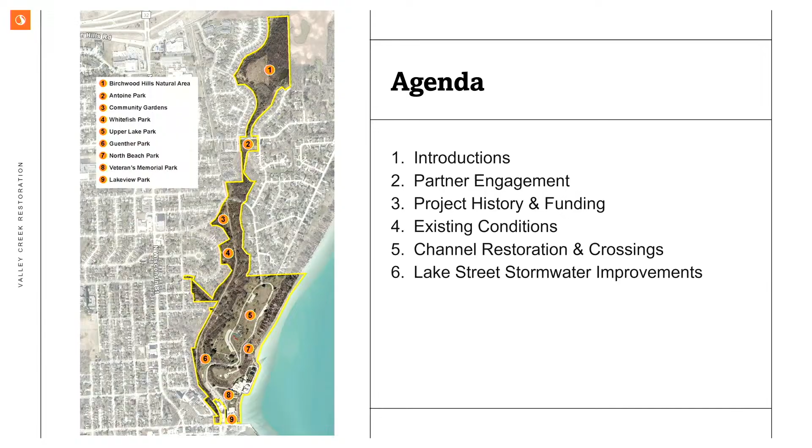So anyway, Lakeshore Natural Resource Partnership, some of this may look familiar to you guys. I came in front of you last summer to get approval on our memorandum of understanding to contract us to do this work. But we've been implementing our education and outreach.

So I have three key components of what we're doing right now. The first is undergraduate research. We're partnering with the School of Freshwater Sciences as well as Wisconsin Sea Grant.

For the School of Freshwater Science, this is our second year, and the students go out to the creek, they collect water quality data, and then they compile that data and give a presentation to Stantec, the city, and LNRP as their final project course deliverable.

One of the interesting things is that the first year discovered surprisingly high E. coli in certain spots. So one of the things we're working on this year is to trace that. We're partnering again with UW-Milwaukee School of Freshwater Science to run some assays to do DNA testing on the bacteria to determine where that's coming from, and that'll help inform the design.

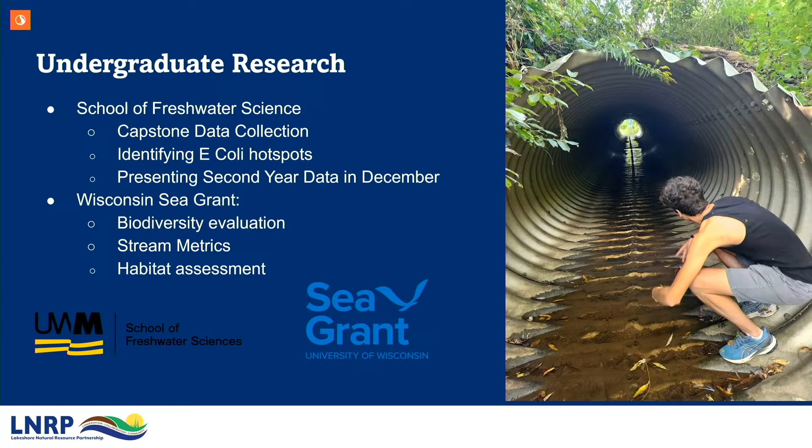We're also partnering with Wisconsin Sea Grant to do biodiversity and habitat assessment. The idea of this undergrad research is not only workforce development, but also a way to get baseline pre-construction data so that once the creek is finally constructed, we can say it's actually so much better because we have data from before.

We're also working on public communication and programming. This photo I have here is from raw footage. We had a drone fly over the whole creek. So far we've shared that internally, but we hope to have before and after, cool videos of certain sections of the creek as well.

That's something LNRP is working on as a way for the city as well as for Stantec and us to promote the work on this project. So stay tuned for more on that.

We also worked originally with UWM, with their GIS class, and we created a story map template, and we've been working with our internal team to finalize that. My understanding is that that's done.

With the public, we're hoping to have an area at the bottom of the story map that has room for public comments. That would go directly to an email address that our project team would look at. So we're hoping that's a space for the public to compile their feedback during the process, as well as provide updates for folks throughout design, construction, and maintenance.

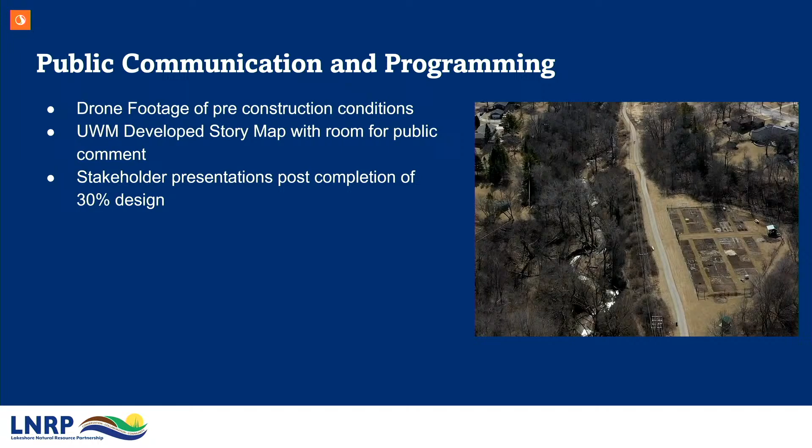And then, like Rob mentioned, we're hoping to do a meeting for the landowners, for folks whose property is adjacent to the creek or closer. That'll be a more technical presentation from our design engineers.

Last but not least, we've been engaging different agencies. We've had Wisconsin Coastal Management, who partially funded this project, Senator Tammy Baldwin's office, the Wisconsin DNR, and CALM, a networking group of other municipalities. We've had them all on site visits to allow agencies to see what we're doing here and look for potential funding opportunities.

Again, I say other ideas because if anyone has any ideas for agencies, or if there are any groups you're connected to that may want to visit the site, I'm literally under contract with you to provide that.

Last but not least is areas for expansion. We're hoping to have an ADA review of the designs by Portal Inc. That's something that once we get a little further in the design process, we'll look at, specifically with community accessibility to the creek, as well as collaborating with indigenous leadership on what the ecological management might look like. I mentioned the E. coli sourcing, and then getting some school field trips. It's something we did a little bit early in the project, but other things have had a ton of momentum, and I'd love to get back to that.

So that is a quick synopsis of the community outreach component of this project. And now I will give it over to Stantec for the technical stuff.

Thanks, Amy. Hi, everyone. I'm Sarah Maderas. I'm a scientist, like Rob said, and project manager for Stantec, and work really closely with Melissa Curran, my colleague, who I think you've all met or seen present previously, to acquire funding for this project in cohort with LNRP and the City of Port Washington.

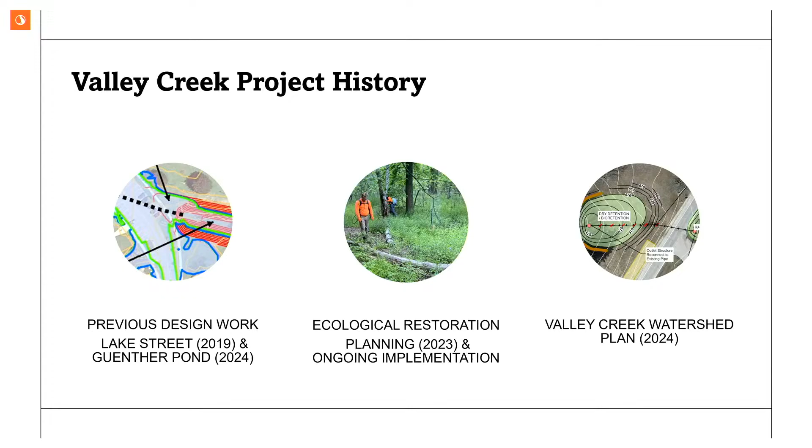Ecological restoration planning occurred in 2023 and has been ongoing since then throughout the Valley Creek watershed. That will continue to be a major component of the Valley Creek design as well. And then, of course, stormwater management planning. That's been ongoing with Aaron since, oh gosh, way back, right? So some of those elements from the 2024 plans will be incorporated in this design. So a lot of the funding that was acquired for those projects that I just talked about provided match and helped build the momentum for this Valley Creek project.

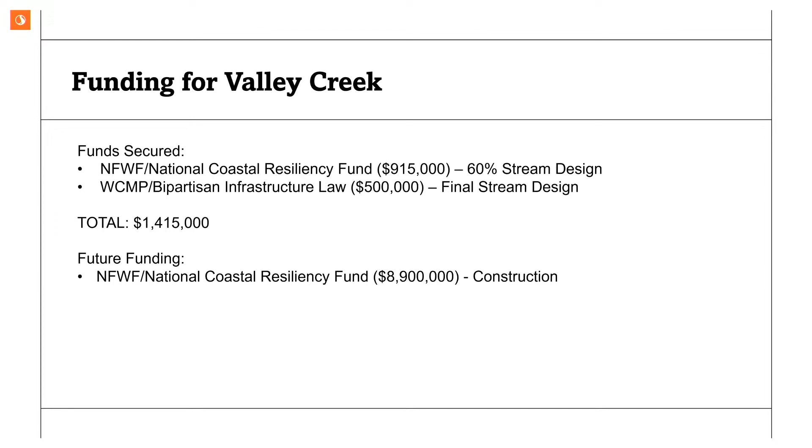The funds that have been secured thus far, Rob mentioned NFWF and the National Coastal Resiliency Fund, and then the Wisconsin Coastal Management Program, Bipartisan Infrastructure Law are the major funders behind the design itself. We're funded to get to final design on at least a portion of the project. So that's great news. And then we hope to have at least a portion of the project to final design by May of 2026 so that we can apply for additional NOAA funding for construction. That'll help put the final puzzle pieces together.

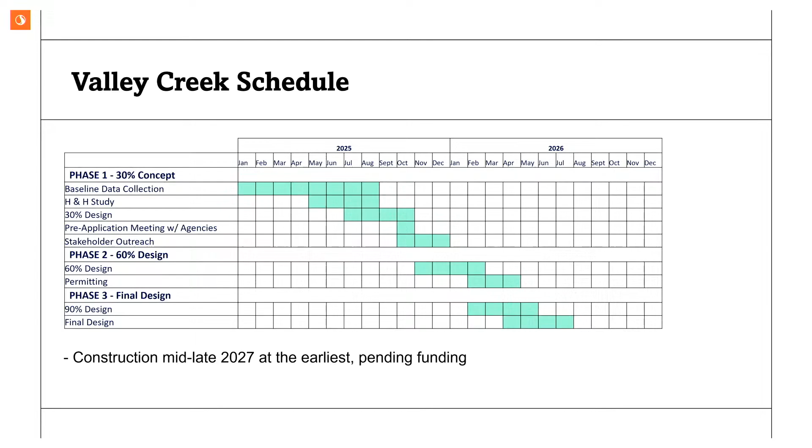Schedule moving forward, you can see where we are to date. We're running pretty much on schedule from a design perspective. Like I said, we're hoping to have final design and initiate conversations with the agency representatives, DNR, and the Corps of Engineers starting this fall and moving into next spring as we move toward final design. And if NOAA funding is awarded, we'd anticipate the earliest we could start construction would likely be mid to late 2027. So that schedule is high level. There's a lot yet to come based on the funding sources. And with that, I'll turn it over to Patrick, who will talk about existing conditions in the stream design.

All right, thank you, Sarah. Everybody, I'm Pat Philbin with Stantec, the lead of the design team on the stream restoration project, or part of the design boys, as Amy would call us. I've not heard that phrase before.

It's interesting. Getting into the existing conditions, we want to understand the erosional processes that are happening out there with the stream currently. And we look to the channel evolution model. With this model, we begin at stage 1. That's a well intact, stable channel, low flow channel, and this low flow channel conveys the base flow. And then whenever we get storms, the waters rise, they breach the banks and come out on the floodplain, the energy is dissipated. And at stage 1, we would consider this somewhat of a stable form that it's able to maintain itself.

But in Valley Creek's case, you get some development within the watershed, also some development and encroachment within the floodplain itself. You start to see increased storm flows, peak storm flows, and also more water coming down through the valley and concentrating down into the channel. And whenever this happens, the channel responds to that through down cutting. All the energy begins to focus within that channel, and at a certain point, it starts to expose the banks, and the banks erode. And so that's what we're seeing out there now in Valley Creek in a lot of these problem areas.

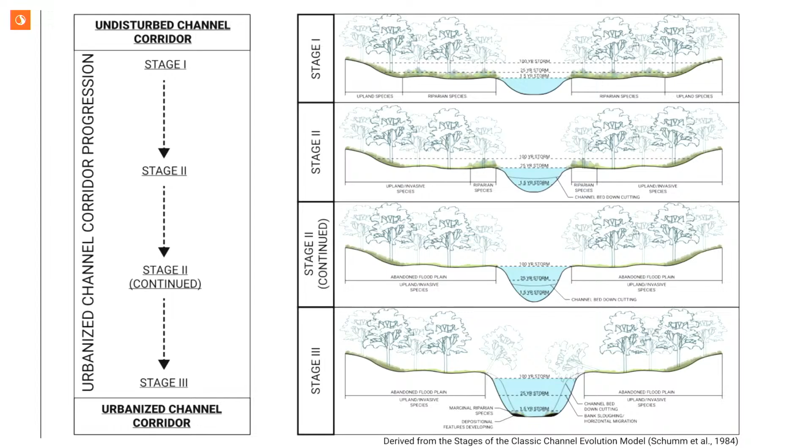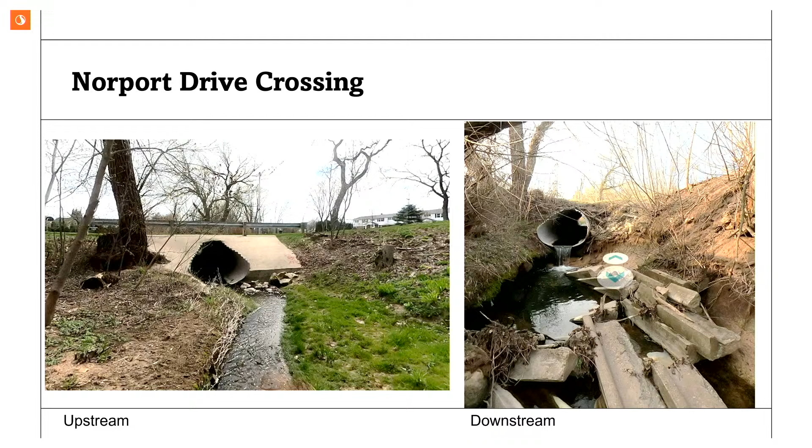So whenever the storm flows are coming through, they start building up and ponding upstream. And then we're finding in the hydraulic model that the 50-year storm is overtopping the road. And then at the downstream end of it, it's coming out like a fire hose and creating this large scour feature. If we just turn ourselves around with the culvert to our back, look downstream, we can see how the channel evolution starts to play into this.

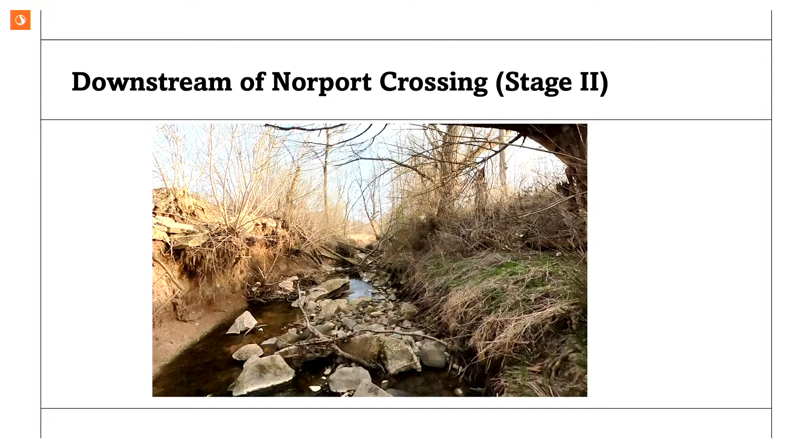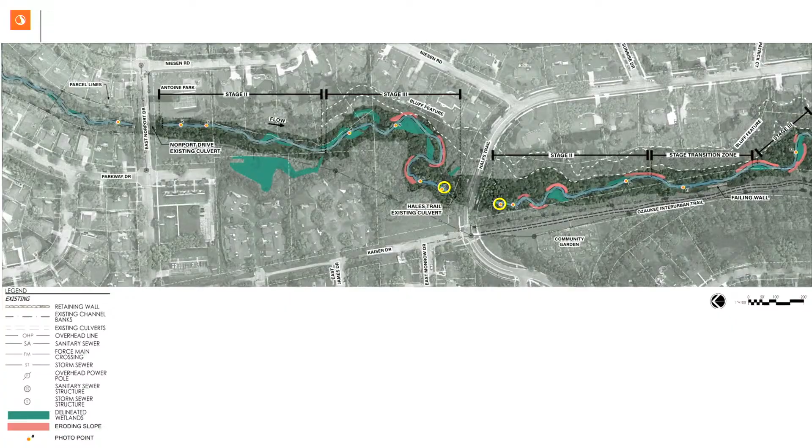We've got down cutting in the channel bed, it's abandoned its upper floodplain, and those flows are concentrated within the channel and starting to progress into stage 3, where we're seeing more bank erosion and bank failures. Continuing downstream, this is just a quick picture of where the channel's eroding the banks, cutting into the existing bluff feature. And then we get to the second crossing at Hales Trail.

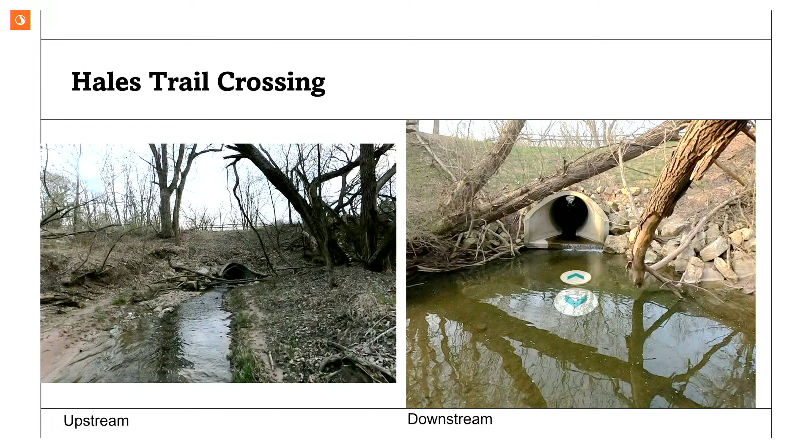Very similar feature, or same scenario as the Norport Drive crossing. We've got a nice stable reach above there, the ponding up, and then it's coming down, creating a big scour feature downstream. And similarly, if we turn around with the culvert to our back and we look downstream, we're seeing that channel incision and active bank erosion.

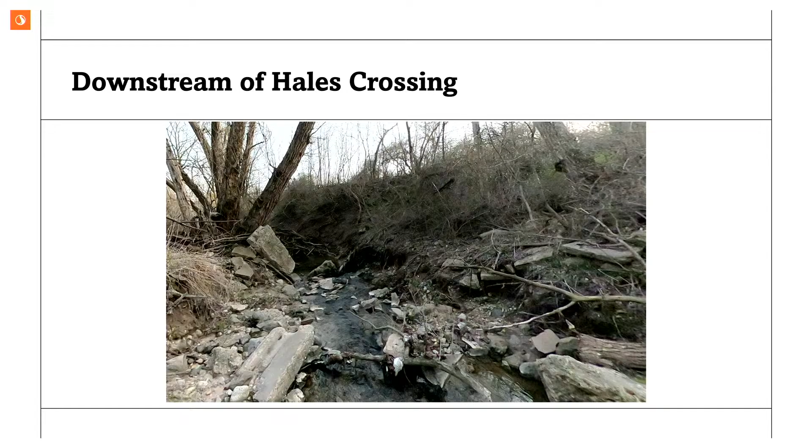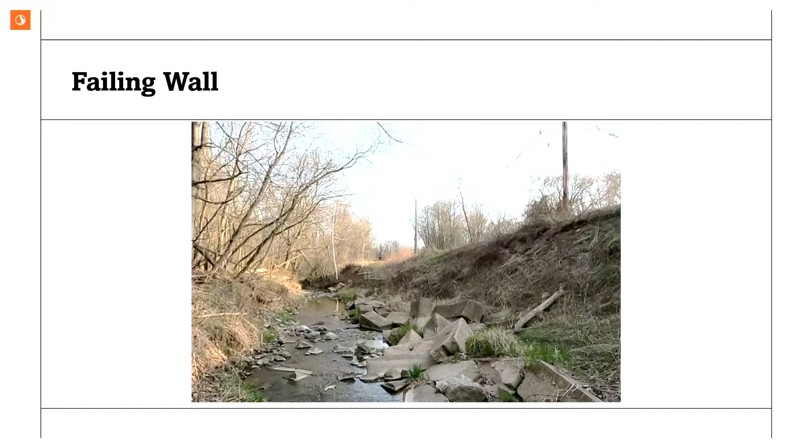And then going down even further in our project reach, there's a failing wall. The bank's starting to erode to the right here. We're looking downstream, and it's starting to encroach upon the overhead utilities and the utility poles and making its way over to the trail, and we'd like to protect that.

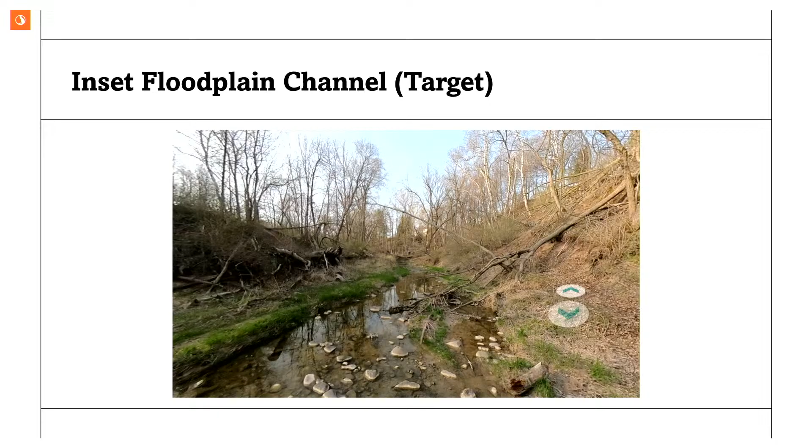And then in a few instances, we actually see what we would like to have our proposed product look like. These are very few instances, but this happens to be one of them. You see less bank erosion here, a low flow channel, and an active floodplain that's dissipating the energy of the stream. And then this is just a picture of where we plan on tying in. This is the channel just before it enters down into the Lake Street culvert.

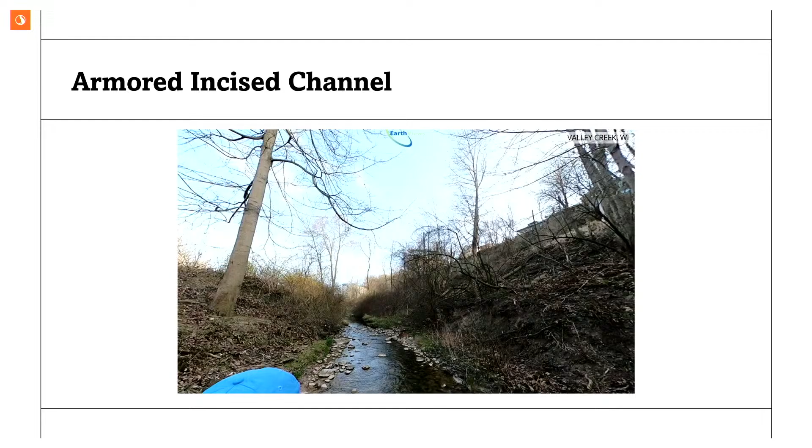So how do we plan on addressing these issues that we're seeing through the Valley Creek corridor? Getting back to the channel evolution model we talked about, we're seeing stage 2 and stage 3. What we want to do is create a new scenario where we reintroduce the stage 1 channel. So that's at the bottom here, and that will be done by filling up the channel bed a little bit, excavating out the eroded banks to give more flow area and allow for that low flow channel to do its work, and then the floodwaters to dissipate out on this newly excavated floodplain.

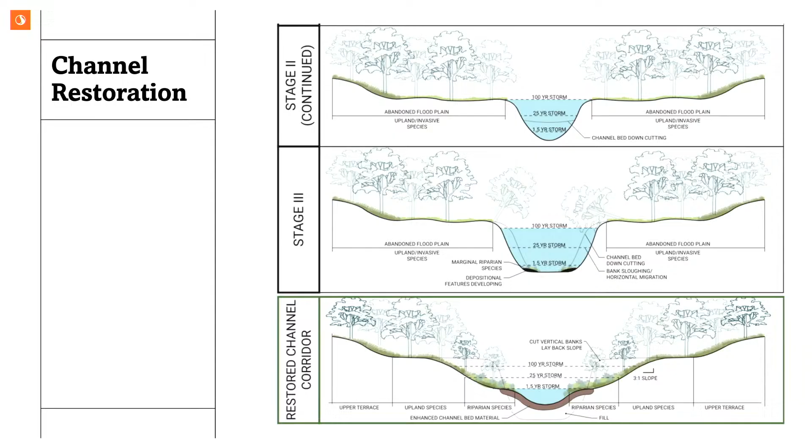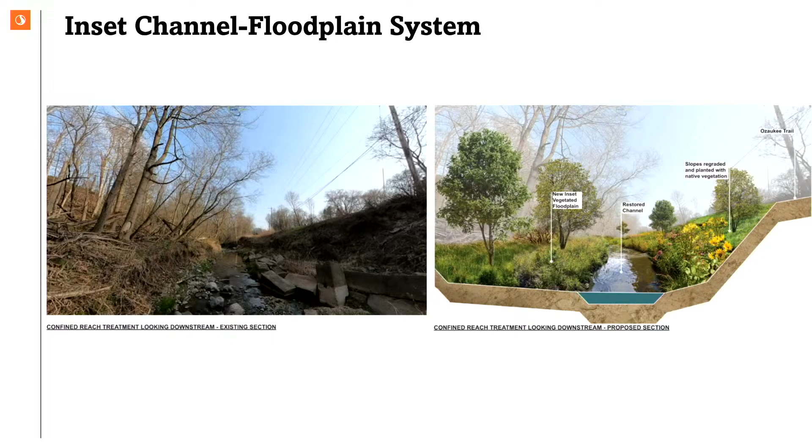To give an example of what that looks like, this is where the failing wall was, and we'll be able to bring that channel bed up and then move it over to the left a little bit, and then lay back the slope that's currently eroding, and then open up more of a floodplain out to the left. And throughout the whole entire corridor, we plan on planting native habitat or native plantings, and this will be nice and greened up for us too.

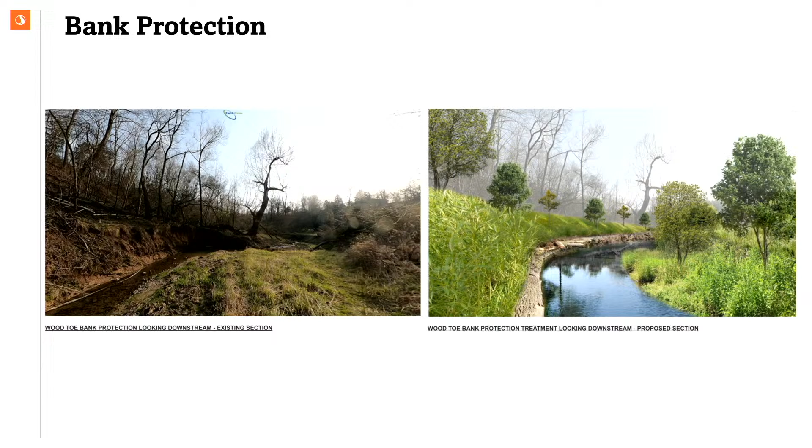And then this is just an example of a riffle that would be running through our project reach. We'd be using the existing rock and bringing some newer rock onto site to fortify the channel bed. And then anywhere we're proposing bends within our new channel alignment, we'd be putting in these types of bioengineered structures. This is a wood toe here. It's just comprised of a bunch of logs and sticks and plantings along the toe of the bank, which would provide some stability in areas where we traditionally see a lot of erosion along the outside of banks to provide that protection.

So continuing through, this is our proposed concept at the moment, and this is the upper reaches. You can see we're starting upstream at Northport Drive. The blue area here is our proposed new channel alignment, and the darker green area is the lower inset floodplain. And then outside those bounds, the lighter green is our slopes tying back up to existing. And then continuing downstream, this is the lower extents that we're showing. We're bringing our proposed channel work down to the parking area at Lake Street, and we'll have more conversation about the Lake Street area in just a moment.

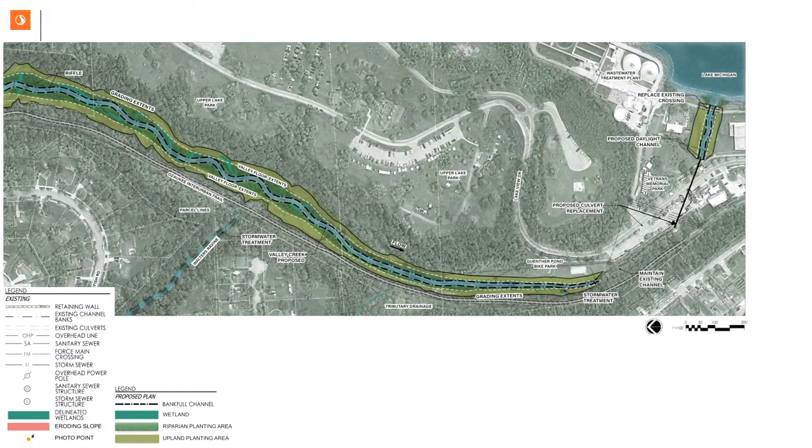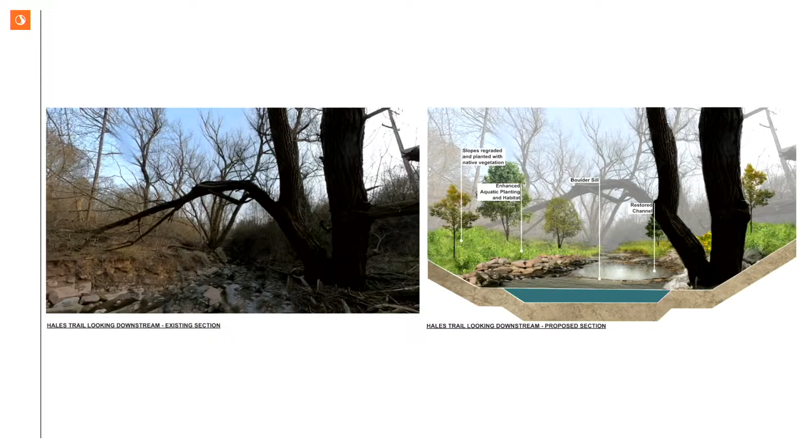So in areas where we don't have the ability to create that low flow channel and floodplain complex, we're going to put in step pool structures. These are essentially just a series of large rock, boulder rock vanes, and pools to dissipate energy rather than dispersing that energy outward. We're going to combat that erosive energy with these larger rock features and scour pools. And then this is another example looking downstream of what that would possibly look like.

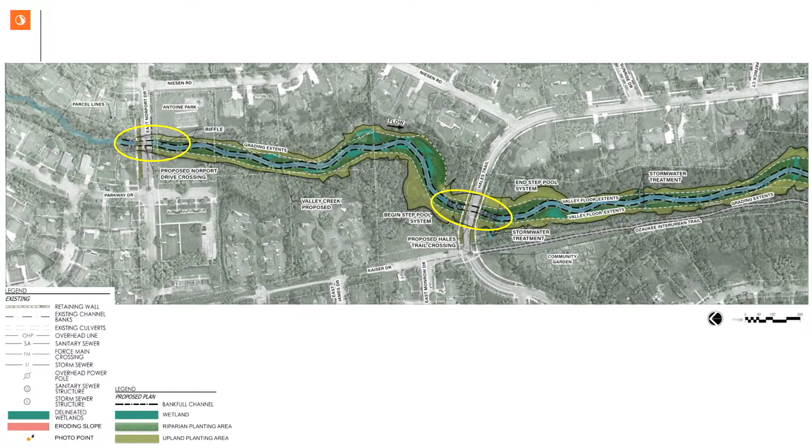Continuing, we talked about the 2 crossings, which are an issue right now. Right now, our bridge engineers are actually looking through 2 possible alternatives, one being a 3-sided culvert, such as this, and then the second option being a single span. And we're working with them to try to get some type of finalized concept for that.

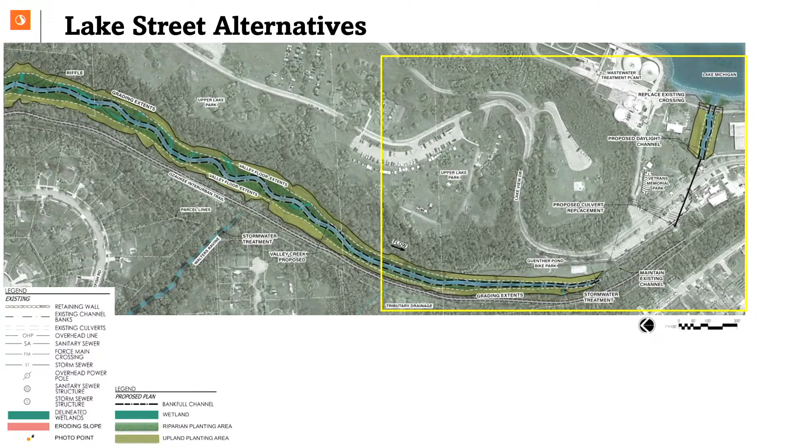And now focusing in on the Lake Street alternatives, we understand that there have been some flooding issues down there, and we'd like to propose some solutions to alleviate that. The first approach is simply just removing the existing culvert. Right now, it's undersized. It's passing the 10-year storm, and anytime we're seeing larger stream flow, it's overtopping and flooding out the Lake Street. And something we wanted to consider in this is, there's minimal parking space already down there, and we would just like to maintain that parking space for you guys to have for these events and everything that you have down here.

So by removing the existing culvert and replacing that with a larger culvert, that would convey larger storms, alleviating those flooding issues. And then daylighting that out, just as it gets beyond the parking area, into an open channel the last 200 or 300 feet before it ends up in Lake Michigan.

Second alternative is a split flow scenario. So as we understand, the existing culvert maintains the 10-year storm. So we would allow for the 10-year storm to pass through the existing channel and go through the existing culvert. But any storm flows above there would access this overflow wetland complex to the left where the Guenther Bike Park currently is. And then we would place a proposed storm inlet at this location and convey the flood flows subsurface through a culvert underneath the parking area of Lake Street and daylight that out into the new open channel.

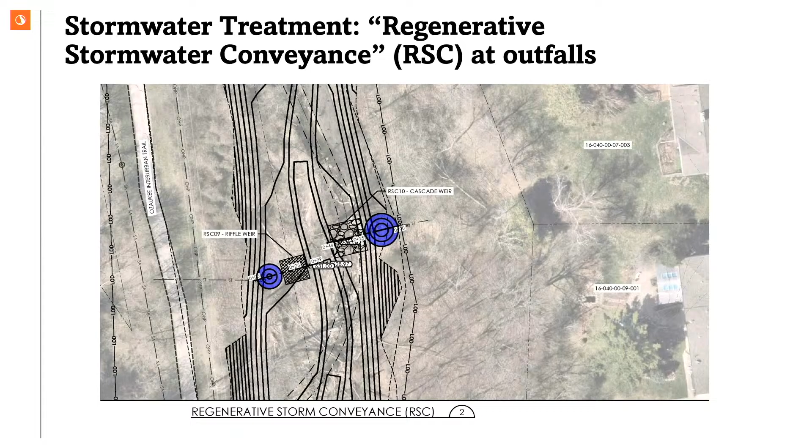They are sort of a small scale version of the step pool system that Patrick talked about. Basically, the idea is that they use a series of rock cascades or rock drops combined with pools to both protect against scour and erosion and also to some extent filter stormwater as it passes through there, rather than just having storm sewers outfall into the creek without any sort of water quality treatment and without really adequate stabilization for scour.

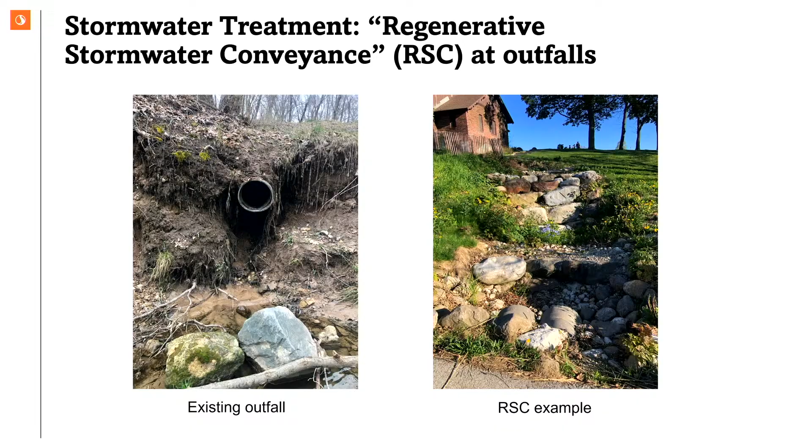We didn't want to call it the Whitefish Ravine because Whitefish sort of loops around. There's actually a couple different ravines and channels that come off of Whitefish and Lakeview. But if you call it Walter Street, that sort of pins it down. But if anyone wants to suggest an alternate name for this ravine, there's still time.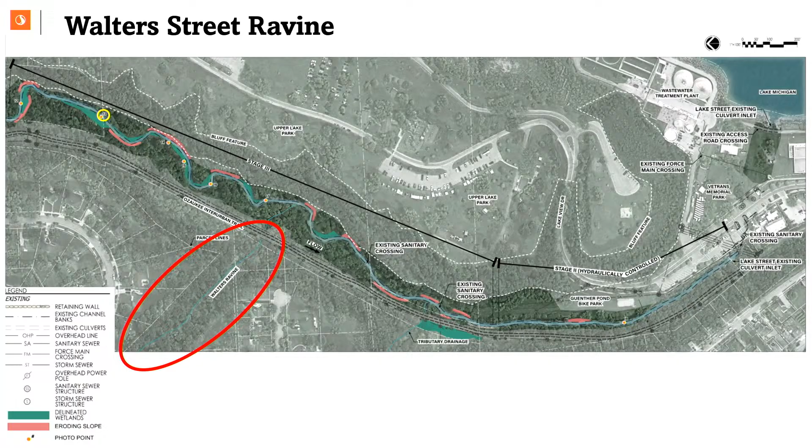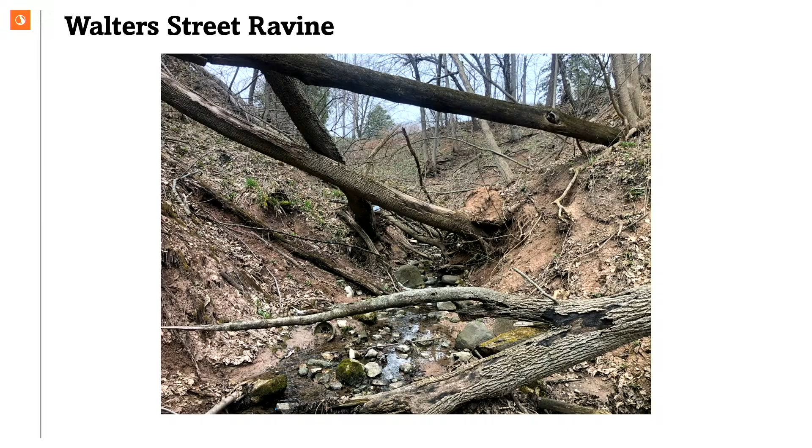This is similar to Valley Creek itself. The ravine has experienced a lot of the similar issues, just on a smaller scale. There are several storm sewer outfalls. There's no stormwater detention because of the age of the development in the watershed, unlike some of the newer areas of Port Washington where we're putting in stormwater management ponds and green infrastructure and stuff like that. So there's down cutting, channel instability, channel erosion, some of the same things that Patrick talked about on Valley Creek itself. Here's a photo of existing conditions.

We're looking at a step pool system here. Patrick has talked about a similar step pool system that we'd be looking to implement in certain parts of Valley Creek itself. This is an approach where the valley is steep and confined. There's not really room to allow that stream and floodplain to spread out and dissipate its energy that way. But with these drops of water, we use rock drops to control some of that energy and force, with pools spaced between them. The idea is that the pools provide some filtering, maybe some aquatic habitat and so forth.

This is an alternative to what people did 30 or 40 years ago, which was to totally armor a ravine - just a straight run of big riprap all the way down. In some cases that worked okay for stabilization, but we're finding that if we look at something that includes pools and riffles, generally people find it looks nicer and it adds ecological and habitat value also.

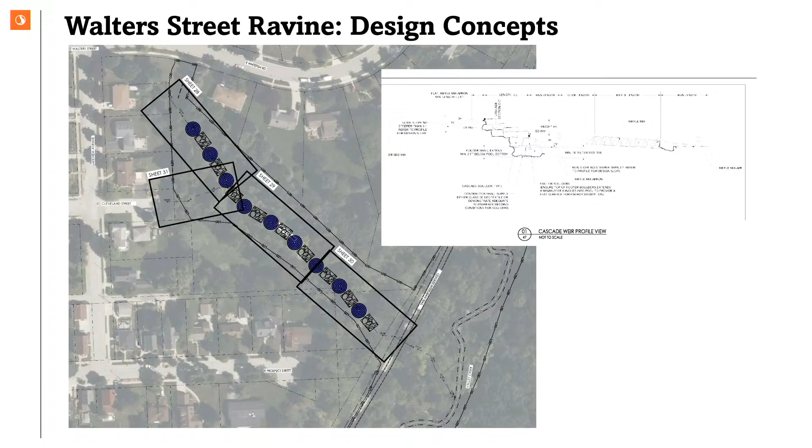Other question I had - I'll stay towards the end - is with the culvert crossing at Lake Street. One thing is with replacing a box culvert, and even though we're daylighting it in the park, culverts aren't typically very picturesque. Nobody goes and takes pictures or admires your box culvert entry.

It might be worth losing some of the parking in order to make a shorter, more bridge-like crossing at Lake Street. There's some opportunity for more parking west of the band shell along the wastewater treatment plant access road, which has been widened at the request of Fish Day but isn't used for much. It's just a little parallel parking now, but that could become angle parking, making up for parking lost to a more naturalized creek with a shorter crossing, which is probably cheaper to build as well. So just something to consider.

Another question I had was about River Curves, where we were showing the logs along the side of the creek. What type of maintenance will the city have to do to maintain that? I presume if they're logs, they'll eventually rot away and we'll have to do something else, unless that's planned for. Is this naturalizing the creek enough that we don't need to worry about replacing the logs in the future?

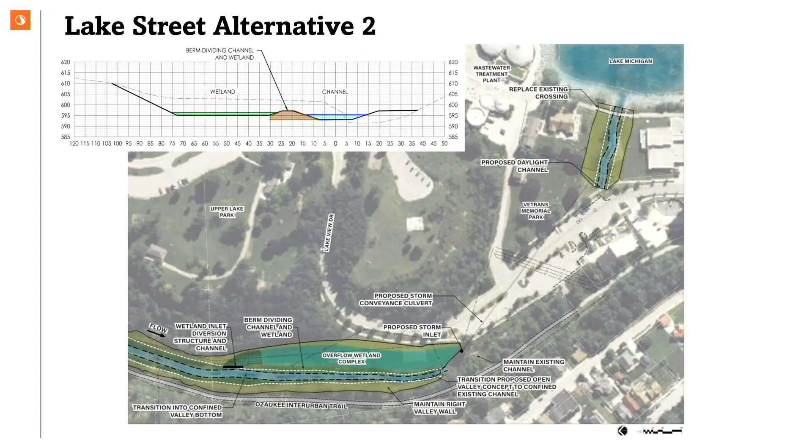Can I ask Mike, why do you prefer the culvert over the bridge?

Generally, it depends on the culvert type structure and what you're doing, but generally the culvert type structure tends to last longer with less maintenance than a bridge. I suppose that depends on what you're doing. You could look at the Grand Avenue Bridge on Sauk Creek, built in 1917, I believe, which is one of the oldest existing bridges in the county and it's still in really good shape.

It's been expanded a lot over the years, but that type of structure seems to hold up well. I'm not sure about something like Contech's rapid insertion aluminum type structures, exactly what the longevity of that is. But when you start to get a bigger bridge, that's much more expensive, and it tends to cost more to maintain because you have to widen it. It's a much longer crossing, you've got a bridge deck and stuff, whereas with the culvert you basically just run the road over the top. So that's my concern, bridge structures seem like a bigger ongoing maintenance obligation than a culvert.

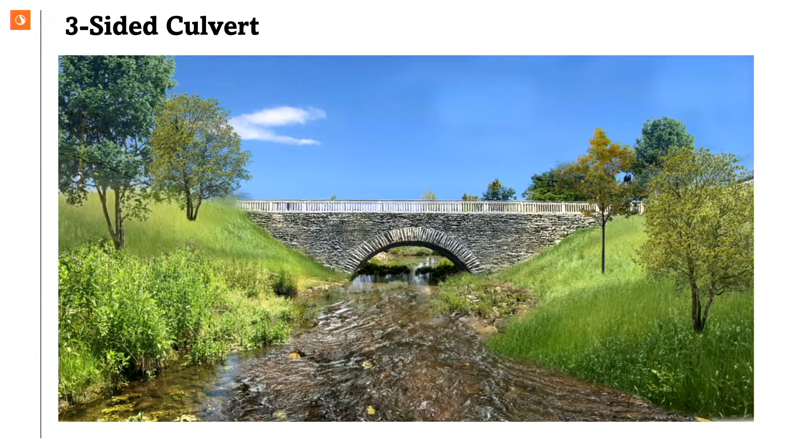If I'm just making assumptions based on the structures, one's a bigger maintenance obligation and would cost more in the future. So if you have better numbers to prove me wrong, by all means, we'll listen to them.

My concern, and this is something we'll have to work out, is I worry that someday debris is going to get back into the channel, and that could clog more than the bridge, which is such an open space. It would be more of a catch. I actually kind of like the bridge better.

The other thing we've talked about is a bridge offers the possibility of running a trail through the bridge opening. You may have seen that done, where you build a little shelf or bench next to the stream. We haven't talked about it a lot, but I think it's something we'll be looking at more in the future. Trails and trail connectivity would probably work better with a bridge opening if you want a trail that didn't have to rise to street level and cross the street. So just something to consider also.

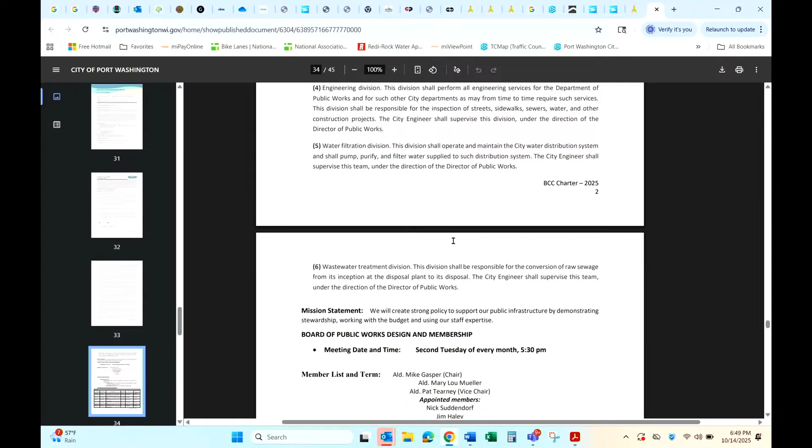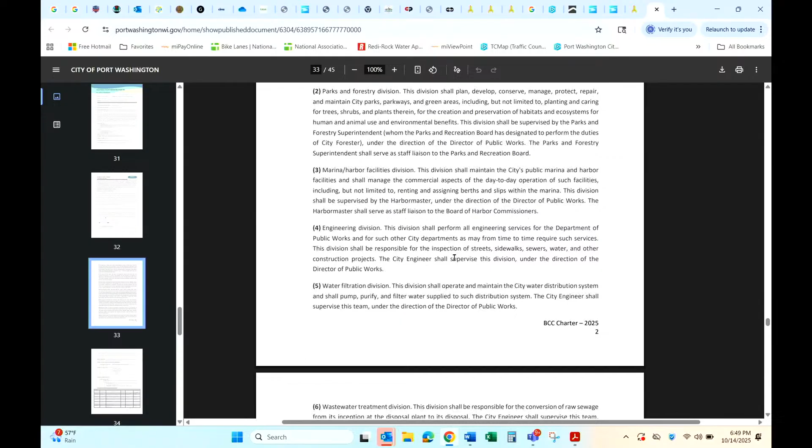So we're going to be cleaning all that up hopefully in January when we're in the first quarter of next year. Okay. I'm just bringing it up because otherwise I'm afraid it'll be 3 years from now and we won't have cleaned it up yet. It could be. Sorry, that's the one, the organization? Yeah. Okay, I'll make a note. And yeah, just next time the opportunity arises, include that stuff. Sure.

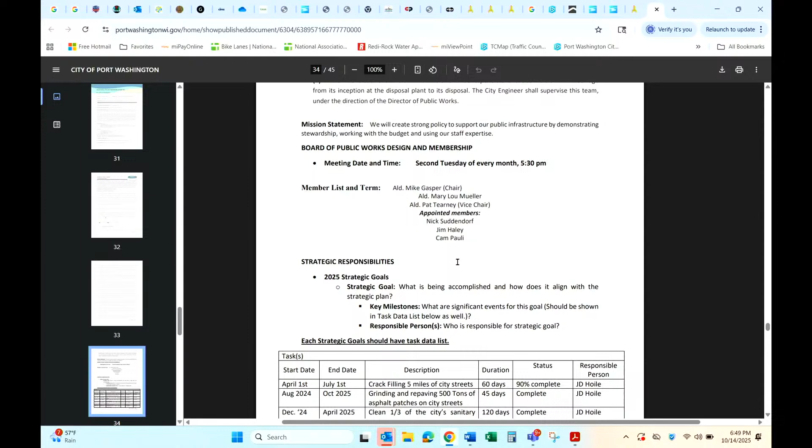And so I'll read our mission statement because I had this conversation with Mary Lou about making sure that everyone on the board was aware of our mission statement. We will create strong policy to support our public infrastructure by demonstrating stewardship, working with the budget, and using our staff expertise. We have our strategic goals listed, and that's really what I typically go through for our quarterly report. We have a number of items under our strategic goals. So I'll blow through them as quickly as we can. Most of them were either complete or on schedule.

For instance, in the street department, crack filling and the pavement patching that we do every year is complete or nearly complete, along with cleaning a third of our city sanitary sewers. We sweep the streets every month, and then in fall we're through every street at least every week for the 2 months of leaf collection. Cleaning half of the city's 400 catch basins takes place every December, so we haven't started that yet. We have a new street sweeper in our street department. You may remember the one that we had was not doing the job, and so we needed to get a new one. This year, that's been delivered.

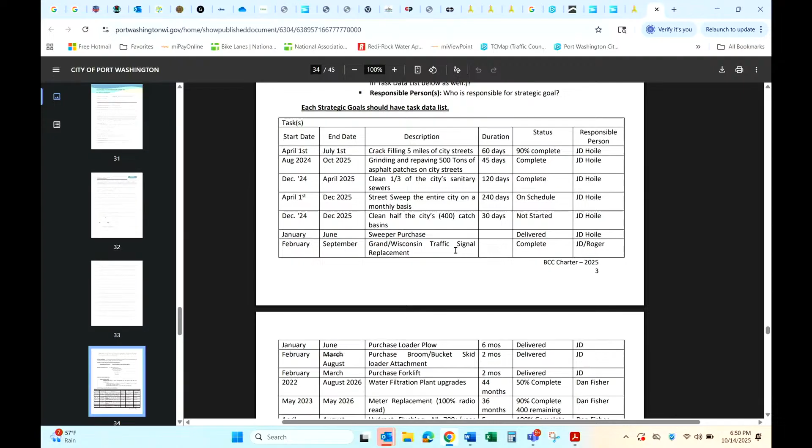We have a new traffic signal at Wisconsin Grand that had outdated equipment, and I think it's a real great improvement. I'd like to hopefully have a demonstration on that sometime because it is pretty cool what you can see. We're not doing a lot with it, but you can actually see what's going on in the intersection if you want to, but we just look out the window.

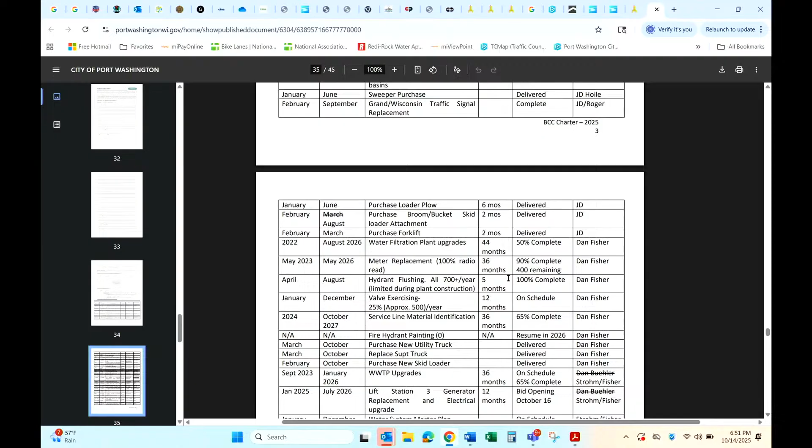The old one wasn't an old electromechanical one that you kept around as a curiosity, huh? What's that? The old controller wasn't an old electromechanical controller that you kept as a curiosity or anything. I don't know. I'd have to ask Roger.

But yeah, what I like most about it is the pedestrian feature. I think occasionally with the old one it would not work, and also I'm sure everyone knows occasionally the loop detectors didn't pick up traffic and people would sit there forever. Anyhow, made sure with the video detection it works for bikes now, right? I think it does. It does. Okay. So in any case, we're real happy with that, and that's completed. And kudos to Roger and JD who made that happen.

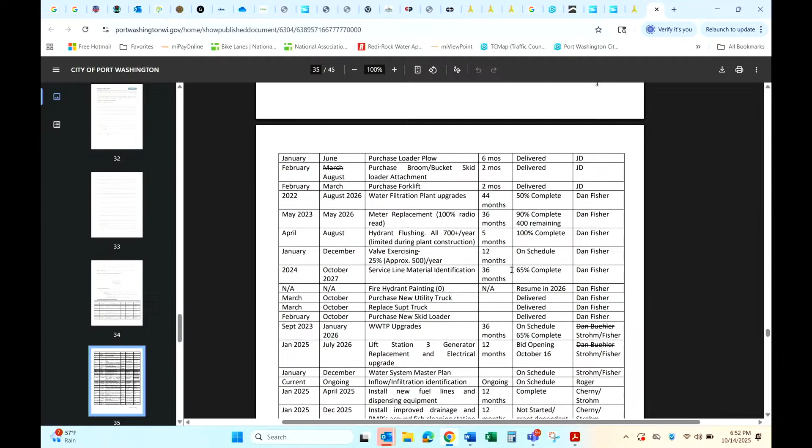And so we have, of course, 2 more signals in the city that we, I think, have in the budget for next year, right? Yes, both of them. Okay. All right. And so we have our new loader plow, our broom bucket skid steer attachment, and our forklift. And so that closes out the street department.

The water plant upgrades, we're at 50% complete for that. We're at 90% of our meter replacement, so Dan has really been tearing it up on that. We only have 400 remaining, and we're currently in the training process for using some of the alarm systems so that even if your toilet is running, that'll set off an alarm, which will notify Kim, who will find it and work with people to let them know that they have a leaky toilet or a hose that's on outside or something like that. So we're making great strides in our technology.

Hydrant flushing is complete, valve exercising's on schedule, and we are 65% complete with our service line identification. We have till October 2027 to complete that, and then implement removal of lead service lines. Hydrant painting, we decided not to do this year. We'll resume that in 2026.

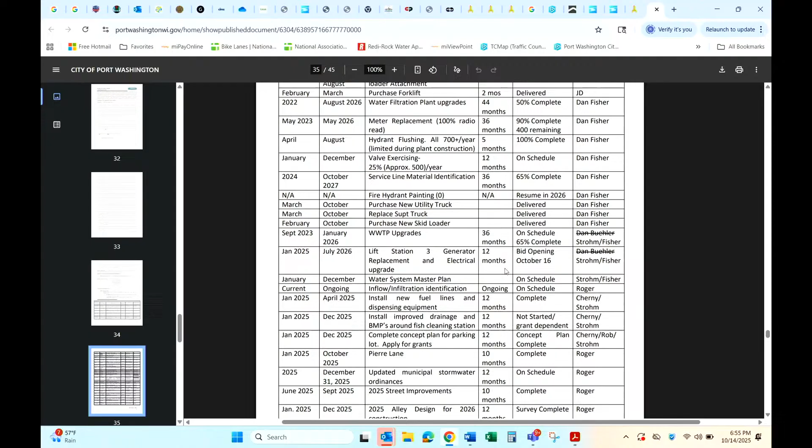We've completed at the marina installation of the new fuel lines and dispensing equipment. The year previous, we had replaced the underground storage tanks, and because of budget reasons, we deferred the fuel lines and dispensing equipment till this year, but that was completed in spring. We have not started the work around the fish cleaning station to improve the drainage; that's grant dependent, so that work has not started.

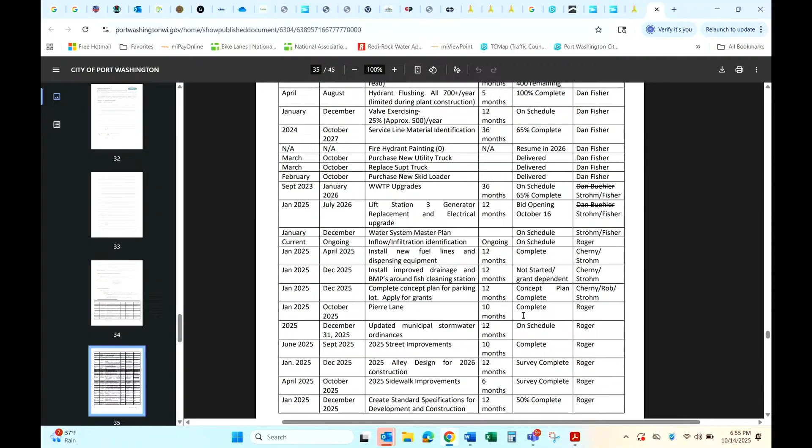We intend to apply for grants for parking lot improvements over at the marina. So that part is on schedule, but until we receive a grant, it's unlikely that we'll be able to implement some of those objectives from the parking lot study that Edgewater did for us late last year. The Pierre Lane Bridge work on the abutments is complete, and that's in your monthly report from engineering.

Roger and Aaron Volkanine, who was here in the blue shirt, have been working on updating our stormwater ordinances, so that is on schedule.

2025 street improvements, I'm happy to report, are finally done, so hopefully you've had an opportunity to drive down Lakeview and the adjoining streets. I think it turned out really nicely, and we received many compliments from happy neighbors, which is great to hear, and a real tribute to PTS, our contractor, and people seem to really appreciate the personal treatment they get from them. So the project went well, and in fact, I don't think we had a single change order for that project, did we?

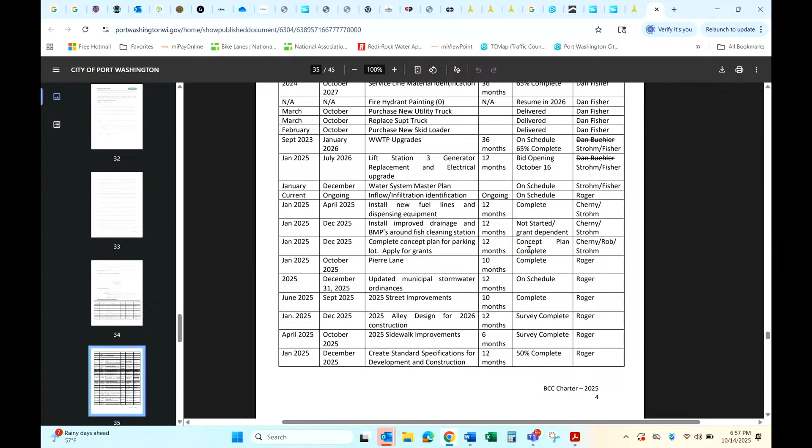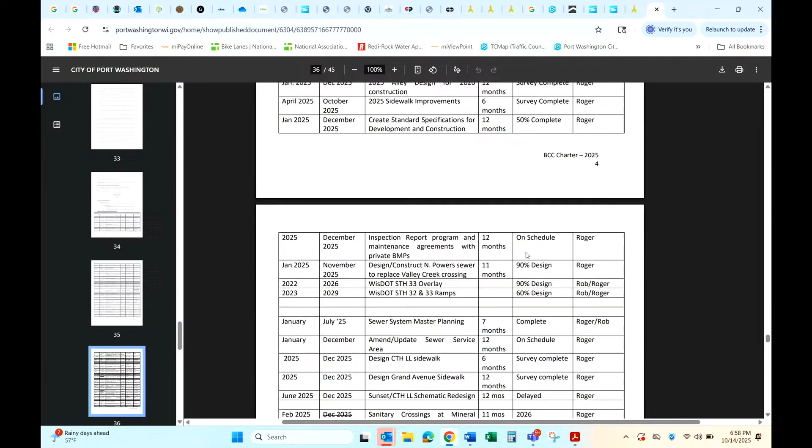And some of the projects that both Roger and I are working on, which essentially are not driven by construction projects, those are maybe a little behind, like standard specifications for developers and construction. And then later on here, there's some other similar projects that I've been working on that I have not been able to start. But

let's see, Roger will be checking best management practices for storm sewer, ponds and other BMPs this fall. The design work to eliminate the sanitary sewer crossing in Valley Creek is being designed by Roger. He's 90% complete. Our Highway 33 overlay, we had our 90% design meeting just a couple of weeks ago with the DOT, and so that is still on schedule for 2026 construction.

The Highway 32 and 33 ramp project, that's still at 60% design. That is likely going to take Grand Avenue out of it because Grand Avenue is going to be a separate design project. So it's something that's still more than a decade away, but I think they're going to fold in the ramp project with that highway improvement, which is, we're probably looking at 2034.

Sewer system master plan is complete. We're working on that with Strand. Amending the sewer service area, well, the amendment is complete. The update is currently ongoing. Designing the LL sidewalk, we've completed the survey, but have not completed that. That's LL both near Astor Street and down south of Sunset.

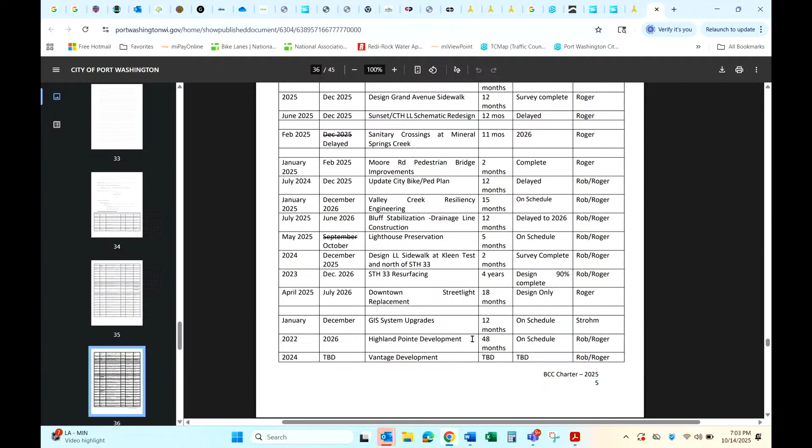I have a repeat on Highway 33, sorry about that. Downtown streetlight replacement is on schedule, design only. GIS system upgrades on schedule. Highland Pointe, which is now on both the north and south side, is on schedule.

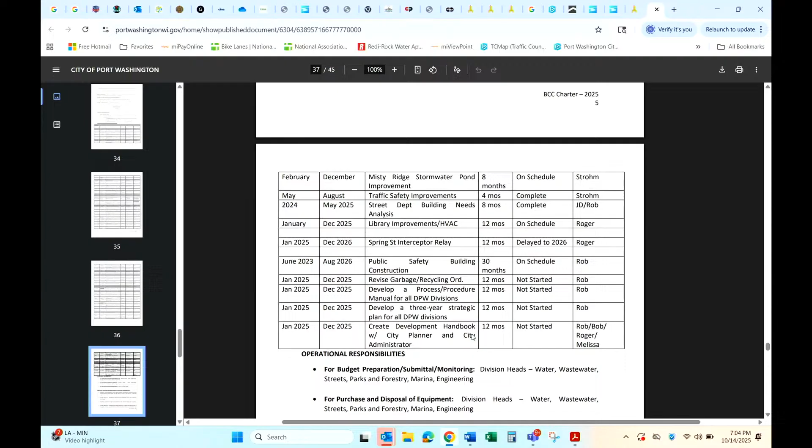Vantage Development is ongoing, of course. I'm sorry, this is such a long list. In any case, the Misty Ridge Stormwater Pond Improvement is starting next week, I think. Yes. Traffic safety improvements, the new rapid flashing beacons, are in place.

We have completed the street department building needs analysis and the library improvements. Do you know, Roger, when the library is going to reopen? January 31st of '26 — wait, that's when the project will be done. When will the library reopen? It's open. Okay, all right.

The public safety building is on schedule, maybe even a little ahead of schedule, as you can see, that's going up rapidly. A few of the more administrative items we haven't gotten to just because we're very project heavy, as you can tell.

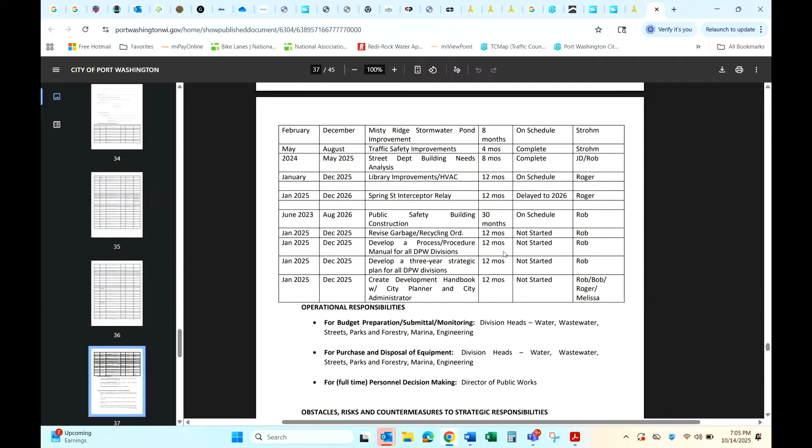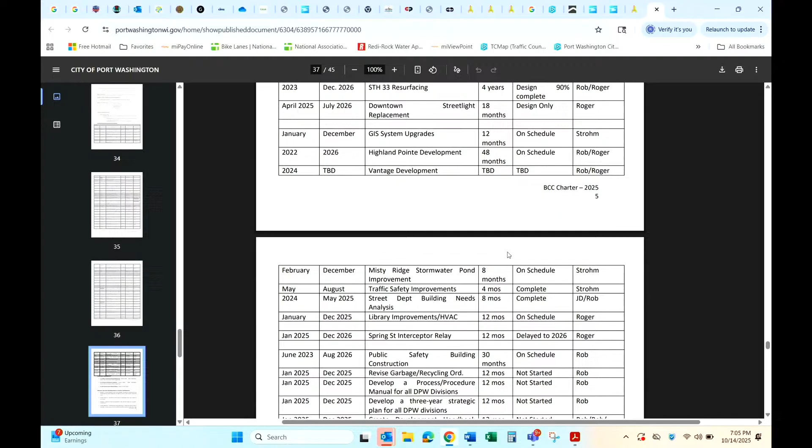But revising the garbage and recycling ordinance, I hope to bring that back. We do update standard operating procedures on an ongoing basis, but we need to develop a more comprehensive process and procedure manual for the DPW divisions and a 3-year strategic plan. I already mentioned the development handbook and specifications. So those are things we can get going on in-house once the dust settles on some of our projects, but it's been a busy year. It's really been a busy couple of decades, but in any case, we'll never run out of things to do. So that is the third quarter report on our strategic goals.

We'll be hard pressed to give you as many buildings to work on at one time in the future. Yeah, we have what, 4 major building improvements plus a lighthouse, and we're contemplating DPW street department improvements and water distribution.

Well, hopefully in 2 years you get a break on building projects for a little while. Yeah, I think we have in the budget both the Pebble House and Grant Street — or Judge Eggert House, both are budgeted for next year, smaller houses. A little smaller than a police and fire station and a water treatment plant and a sewage treatment plant.

So that takes us into item 10, review monthly staff reports. Does anyone have any questions about them? I'll spare you more talking. If nobody has any questions, we'll continue.

Item 11, chairman's business. I do not have any tonight. Is there any members or liaisons business?